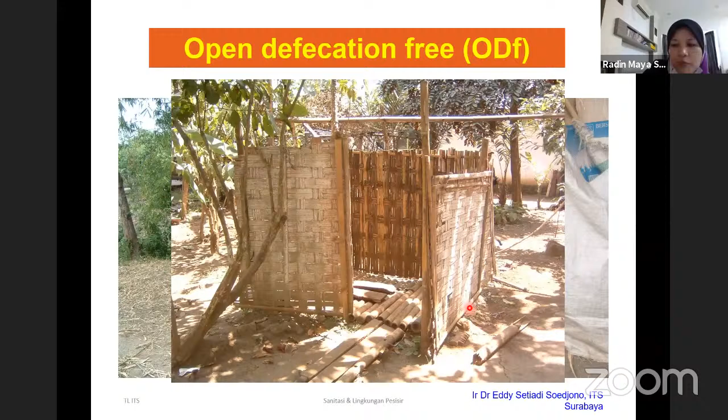Next is about sustainability and sustainable development. As we know, to achieve sustainable development, we must have three components: social equity, economic efficiency, and environmental responsibility. For social equity, we must have good living conditions, equal opportunity for all races, social cohesion, international solidarity, and also maintenance of human capital.

For economic efficiency, we need to have good and sufficient funding so that every sustainable development program or agenda can be achieved. And for environmental responsibility, I think the most important thing is how we deal with and manage our resources. Every country has lots of resources, so how they manage and utilize them to make things better and make sure the sustainable targets can be achieved.

So what are the materials and waste, the risk, rate of change, and also the natural and cultural landscape that we have.

First of all, for wastewater, we have two types of wastewater. This is generally the definition. Domestic wastewater comes from residential areas, commercial areas like shopping malls, institutional facilities, and also recreational facilities. It contains lots of decomposable organic matter and also pathogenic agents.

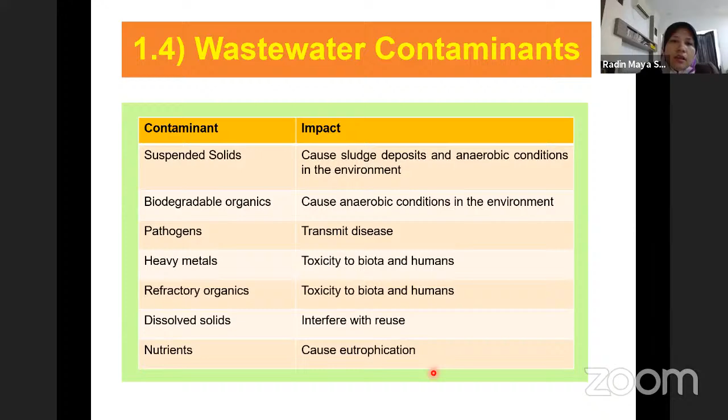Next is about centralized and decentralized wastewater systems. What's the difference between them? In this lecture, I will give you this comparison so that you can distinguish between these two systems.

The conventional centralized system is actually conventional treatment. It has been practiced in most countries, especially developing countries. How does it work? The treatment system is at one location, and it can treat large volumes of water at high rates to accommodate all residential, business, and industrial users. So in Malaysia and many developing countries, they use this type of centralized system.

But of course, it requires high capital costs and also the operating and maintenance costs. However, it gives lack of environmental awareness to the community because they didn't know what happens, because they didn't see the system quite clearly.

While for the decentralized system, this is more on the innovative treatment. So they can install their treatment system on site at their house or maybe at their premises. Okay, so it's either point of entry or point of use here. But here the volume of the wastewater should be low because it's very specific to treat a certain premise or residential area. It's low cost, but the users need to know how to do the maintenance, because they need to operate it by themselves.

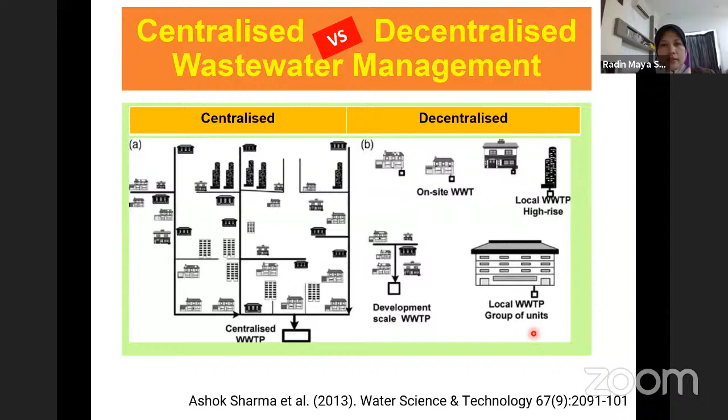For example, here we also have the local wastewater treatment plant, very specific for the high-rise building, and certain scales for some community that share the same area, and also the group of units. So this is the meaning of centralized and decentralized wastewater treatment system. So I go for the examples of the centralized wastewater management in Malaysia.

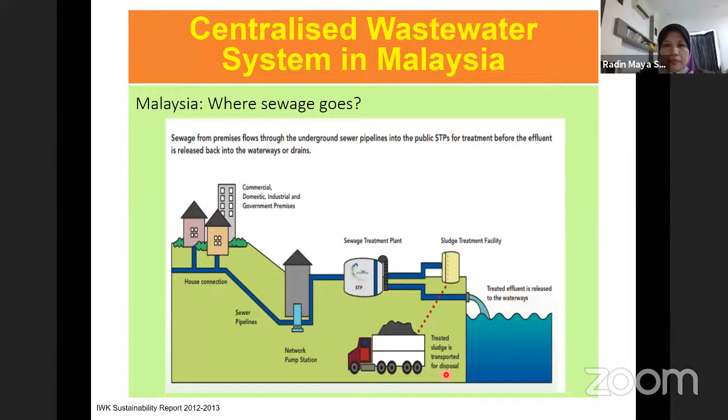Examples of sewage treatment plants in Malaysia are very large scale. So the PE, population equivalent, must be more than a few thousand. Yeah, IWK means Indah Water Konsortium, sewage treatment plant in Bunus. This is the location for sewage and sludge treatment.

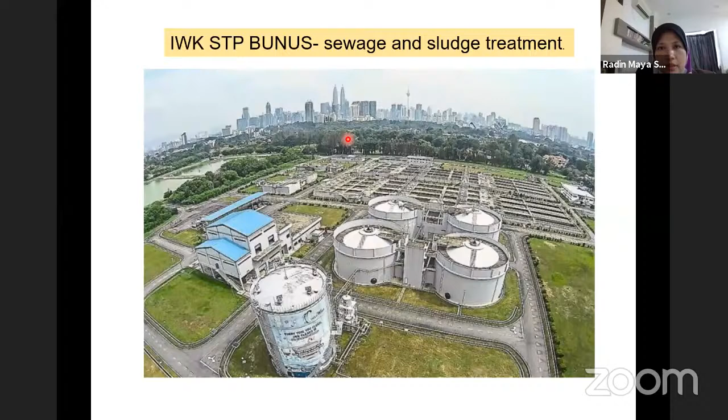Okay, we are using standard A and standard B to check and measure whether the effluent complies with the standard. So after the treatment, we should check here to determine whether our effluent discharge complies with standard A or standard B. It depends on the location of the water treatment plant.

So this is extracted from the Environmental Quality (Sewage) Regulations in Malaysia. This is standard A and standard B. For example, for BOD5, standard A requires you to have 20 milligrams per liter BOD, which is more stringent compared to standard B, which is 50. And you can also check the other parameters. We have suspended solids, oil and grease, and so on.

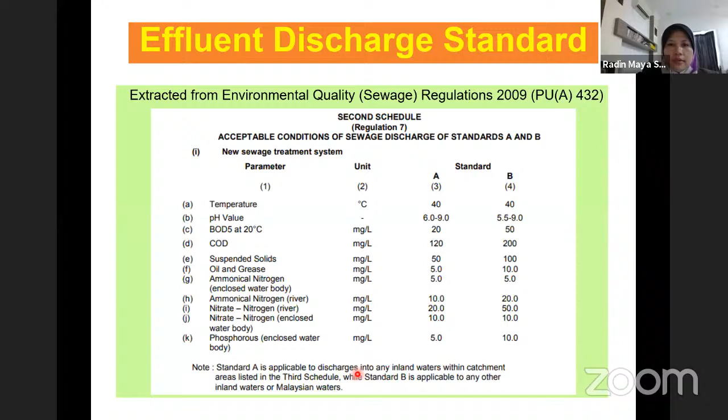But now the government is revising it to include micropollutants or emerging organic contaminants, for example, from pharmaceuticals, herbicides, pesticides, drugs, medicines, because they are very common now in waterways. I think this has become a major global concern too. And because health issues concerning cancer and so on have increased and become apparent, the government is now revising it to include these organic pollutants in the standard.

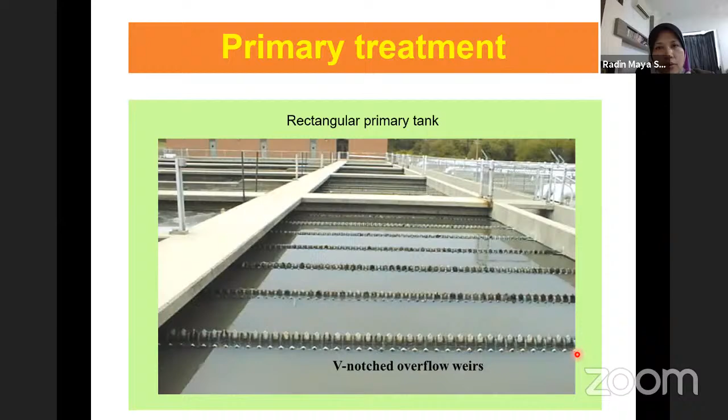In the sewage treatment plant, we depend mostly on our microorganisms because they break down the organic materials available in the wastewater or sewage. These are the major requirements for the microbes to grow. They need an electron acceptor, macronutrients, micronutrients, and also the appropriate environment so that they can form new cells having a specific gravity slightly greater than water, so they can be removed easily by gravity settling. So this is what we aim for.

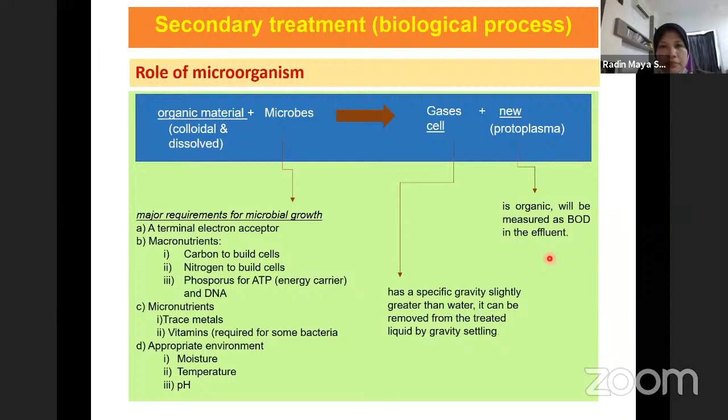And then the new protoplasm, which is organic, is measured as BOD in the effluent. So we target this BOD to be lower after the treatment. We have a lot of abundant microbes in wastewater aerobic treatment, for example rotifers, ciliates, and so on. I'll give you some examples.

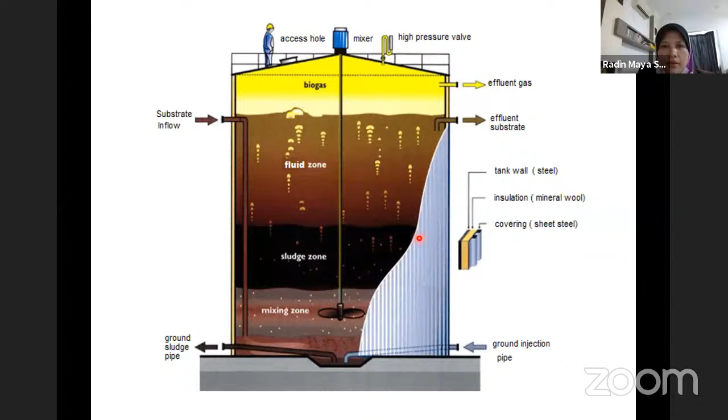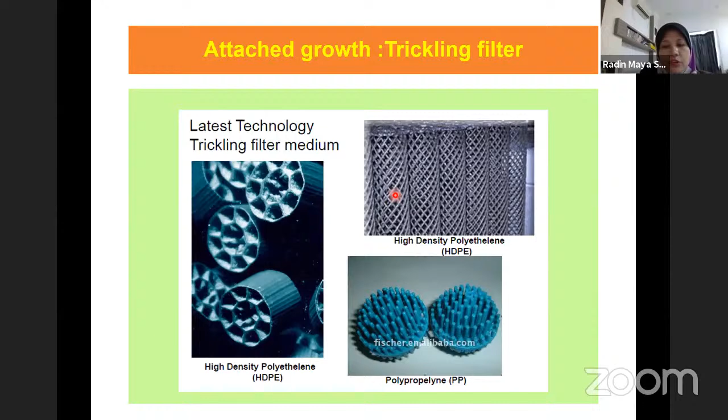For the sewage treatment plant, they can use some of the latest technology to enhance the breakdown of the organic matter by the bacteria. For example, they use certain media, high density polyethylene, HDPE, and also polypropylene, to make sure that they can work faster. And also, for example, the trickling filter, where the slime grows, where the bacteria or microbes attach, so that they can biodegrade the organic matter.

What are the sources of the sludge? We have two: it's either primary or secondary. Sludge from the bottom of the primary clarifier contains about 3 to 8% solids, and mostly 70% are organics. For the secondary sludge, it contains lots of microorganisms because of the biological process, and also inert materials that can be wasted from the secondary treatment sludge.

So you must know where your sludge is coming from, so that you can treat it properly, and then make a decision whether you want to reuse it for landscaping, for fertilizer, or so on. It should come from these two types of sludge.

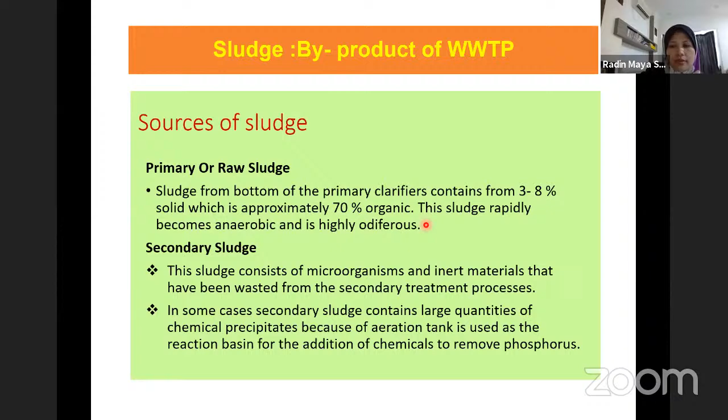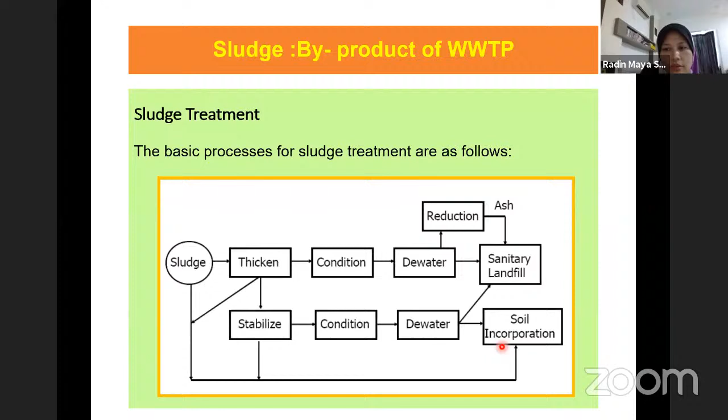These are the basic processes for sludge treatment as follows. We can thicken it, stabilize it, condition it with certain chemicals. We also dry it, dewater, reduce it, and then finally we dispose into the sanitary landfill, or we can use it as soil incorporation, for example, golf course incorporation for the larger scale.

For sludge disposal, we can do land spreading for lawns, gardens, agricultural land, forest land, golf courses, and also municipal solid waste landfill under Subtitle D. And we can utilize it for other materials, for example, construction materials.

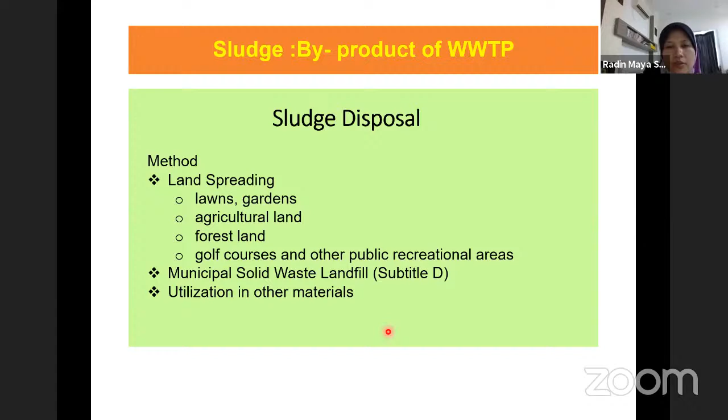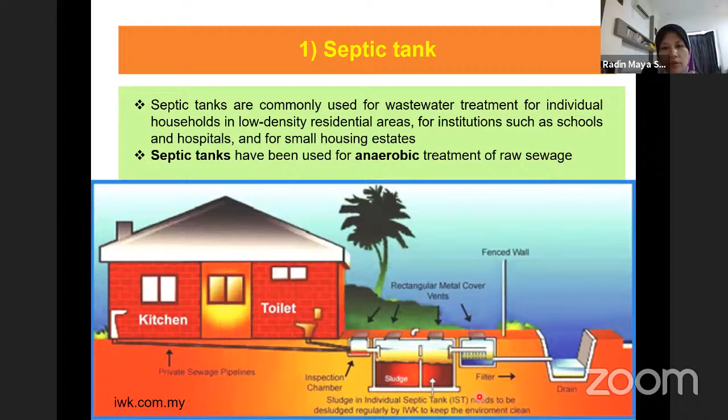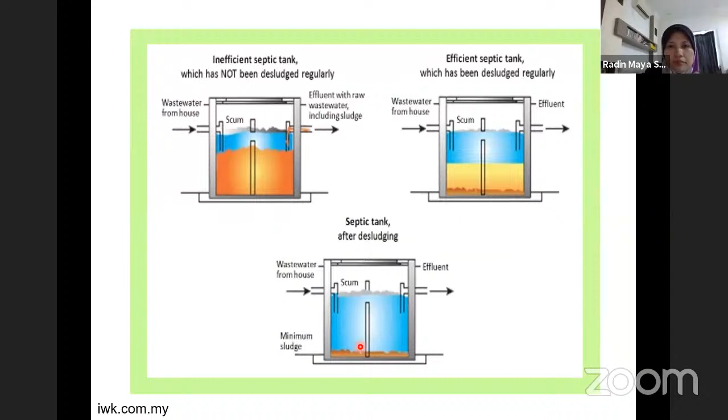Examples of the septic tank for the anaerobic digestion system for the sewage treatment plant. And then we have the guiding principle to design the septic tank. We follow the WHO 1992, because here the principle is we need to provide sufficient retention time for sewage in the tank to allow separation.

We also need to provide stable hydraulic conditions for efficient settlement and flotation, and to make sure that the capacity of the tank is large enough to store the accumulated sludge and scum, and there's no blockage. Everything must be in order. So this is the basic principle if you are to design the septic tank.

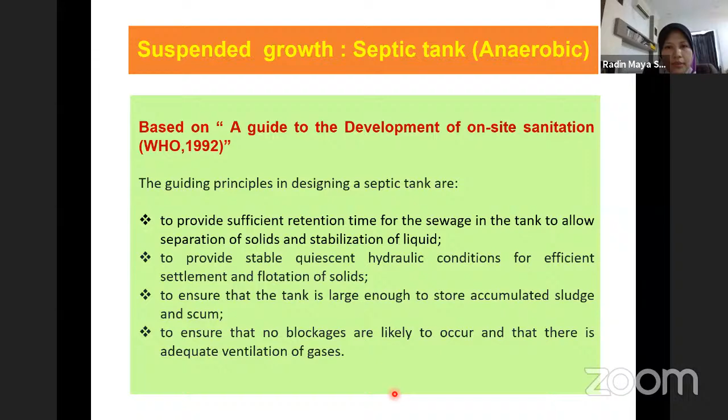To make sure that our sanitation is sustainable, one of the methods that we can go for is renewable energy by using anaerobic digestion. This is becoming increasingly popular now because from anaerobic digestion we can get very valuable biogas from the methane. So it can be used for energy, electricity, for generating your turbine or whatsoever.

Digestate is the solid and liquid digested material produced in anaerobic digestion, and it has lots of valuable nutritional values: nitrogen, phosphorus, and potassium. So it can be used as a fertilizer, for compost, and also animal bedding.

So this is the process of anaerobic digestion. If you have lots of animal manure, energy crops, even food waste, you can create your anaerobic digester here without oxygen. It must be airtight, sealed, so that after a while it can produce the biogas. It can go to the CHP unit and be transferred to the electricity grid.

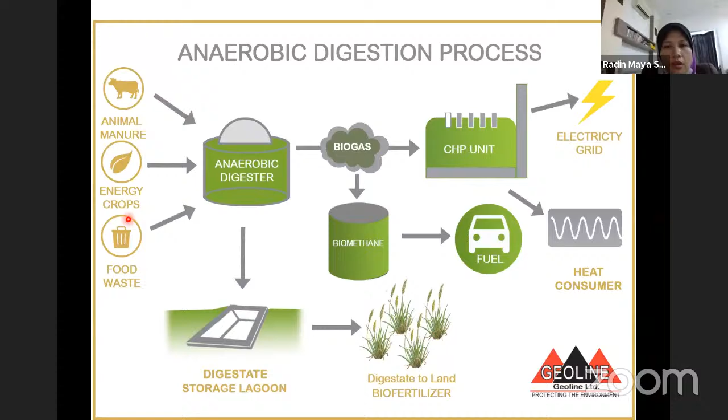I'm sharing with you examples of the project on the anaerobic digester at the sewage treatment plant in Jelutong in Malaysia. They have this biogas AD, anaerobic digester. It produces biogas that can generate electricity for internal consumption at Jelutong sewage treatment plant in Pulau Pinang, Penang Island. This is in the north of Malaysia.

Currently the plant produces an average of 800 cubic meters of biogas each day. Here, a 170 kilowatt gas engine has been installed, and from there it can release electricity from the biogas. It also has an odor control system and a lift in the digester equipment building. So this is the example in Penang.

This is another example of the anaerobic digester using POME. POME means palm oil mill effluent. Because in Malaysia we have lots of palm oil plantations. We are the second largest after Indonesia, and also Thailand. So we have lots of POME.

So the POME, instead of just being released into the treatment system, we can also generate biogas using an anaerobic digester like this. So it can produce the biogas. This is an example of the anaerobic digester in Pahang, in the palm oil plantation.

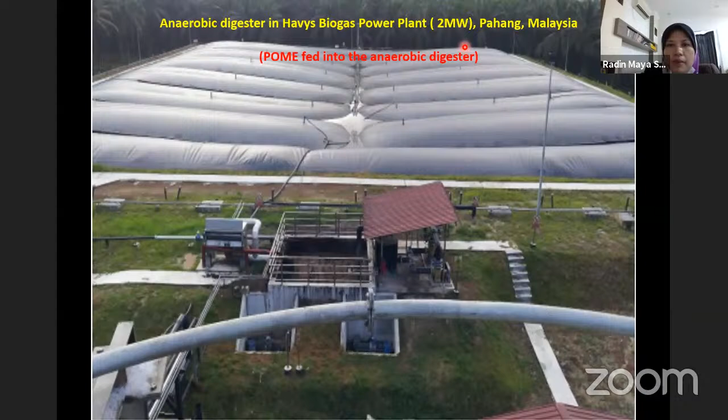Why are the palm oil mills actively involved in biogas production? What's the benefit? Because we want to commit to the Clean Development Mechanism, CDM, under the Kyoto Protocol. As you know, the Kyoto Protocol is the protocol that covers greenhouse gas emissions or carbon emissions.

It also liaises with the United Nations Framework Convention on Climate Change to help developing countries achieve sustainable development through the sale of certified emission reductions, or carbon credits. So this is our approach on how we can commit to the CDM.

Okay, so in Malaysia, we facilitate this by the Conservation and Environmental Management under the Ministry of Natural Resources and Environment.

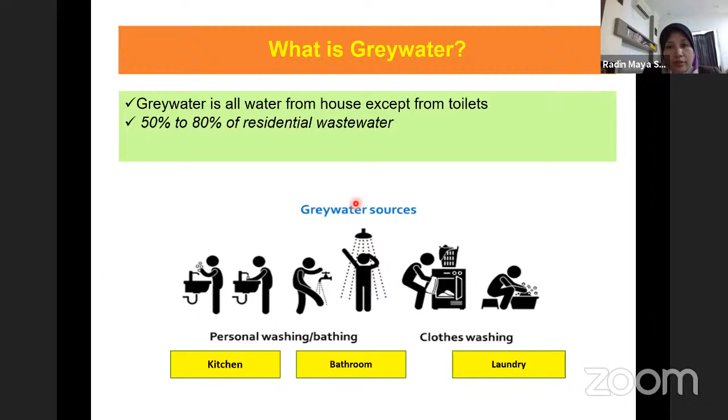A big proportion comes from greywater, which can consist of 50 to 80% of residential wastewater. The problem is, for example in Malaysia, we have lots of direct discharge of greywater into our rivers, like in Kuching. For example, if you have a restaurant premise, only the toilet waste goes to the sewage treatment plant, but the rest goes directly into the river. This gives a very detrimental effect to the environment in the long run.

Okay, so this is one pilot project, Hui Sing Garden in Kuching, by Professor P.D. Jenssen. He's Norwegian, and works very closely with sanitation and water.

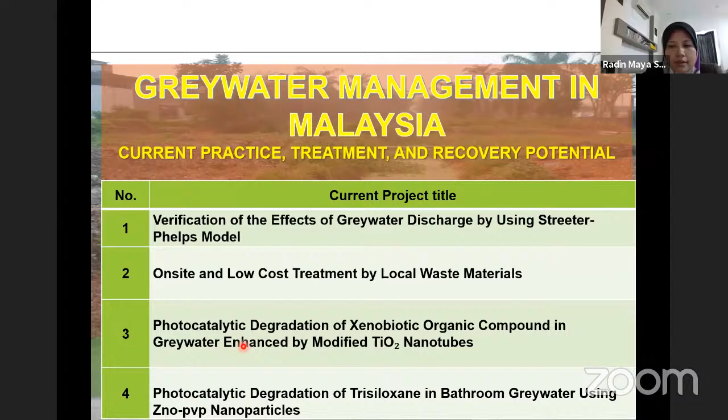This is a common photo showing the practice of how greywater is discharged from households, just near our university. As an example, this individual house in a suburban area has greywater discharge from sinks, bathroom or laundry going to the main water body, and the condition here shows lots of algae, the green one.

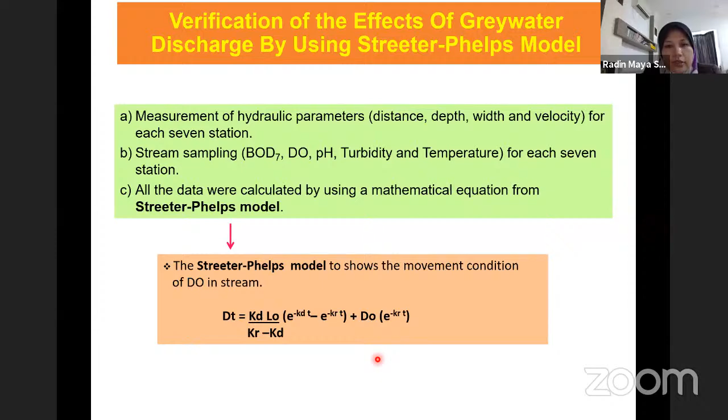Okay, this is the step. We need to measure the hydraulic parameters, and we also need sampling for BOD, DO, pH, turbidity, and temperature. For this project, we include 7 stations, and we calculate using this very basic model, the Streeter and Phelps model, to know how far our greywater can travel and give effect to the river. This is the overview of the sampling locations for the greywater discharge and the stream flow.

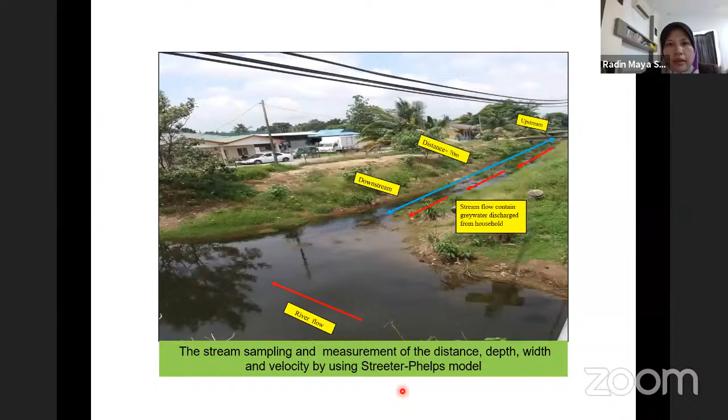And this is what happens in the Streeter and Phelps model, how we see the degradation and decomposition of the greywater. Here, S1, S2 show heavy pollution, yes, because it's very near to the source of pollution discharge. But after a certain distance, we can see the water becomes cleaner. But this is not our reason to ignore the existence of the greywater, because there will be the possibility of non-point sources of other pollution that can come through.

This project is also one of our greywater projects. We use local waste material to reduce the pollution load into the river. So we trap it using our filtration, so the water that goes into the river is much safer. Here we use local waste material - clamshell, ceramic and sand - as filtration. But this needs some maintenance work, cleaning, so it's quite tedious work. Not many people like it, but it's able to reduce COD removal up to 85% using this kind of filtration. But this is only the pilot scale.

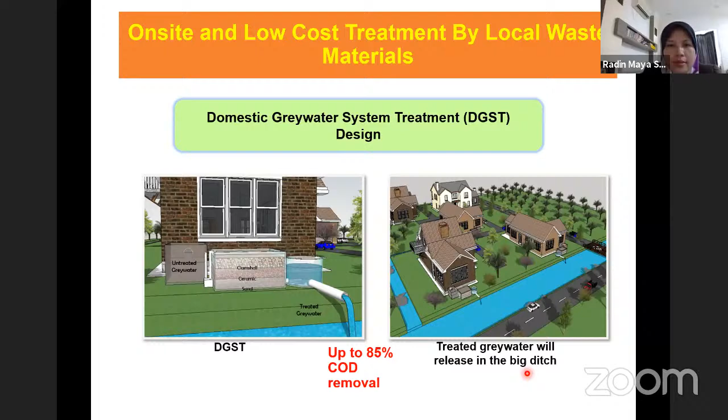For greywater future opportunities, we have lots of treatment strategies to offer in terms of physical, chemical, and biological. But it all depends on the funding, the aspect of your greywater, the strength, and what you aim for - are you going to reuse it, recycle it, or just want safe disposal? So you need to make a good decision.

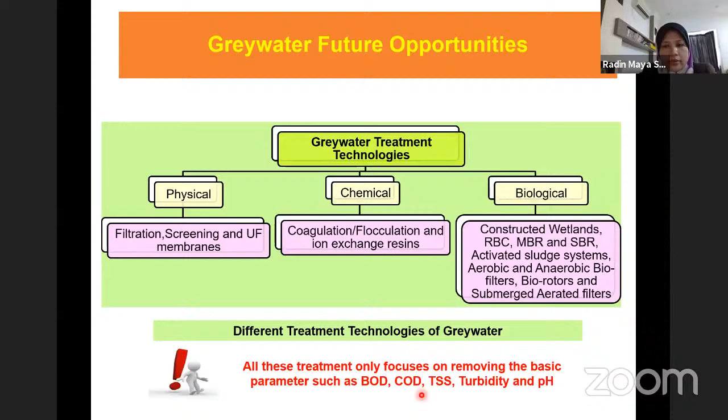But my main concern is, for example, we take a bath every day - I believe everybody does too, shower. In a humid country like Malaysia, we take a bath every day without fail, because if not, we feel very sweaty and it's not pleasant.

So the problem is, from these bathroom activities, we also create personal care products, and with this we call it light greywater that contains xenobiotic organic compounds, XOC. How can we reduce it? Our concern is the houses that directly discharge into waterways like this. For urban areas, all the greywater channels into the sewage treatment plant, that's okay. But for individual houses in suburban or village areas, they don't have this system, so they just discharge into the drain.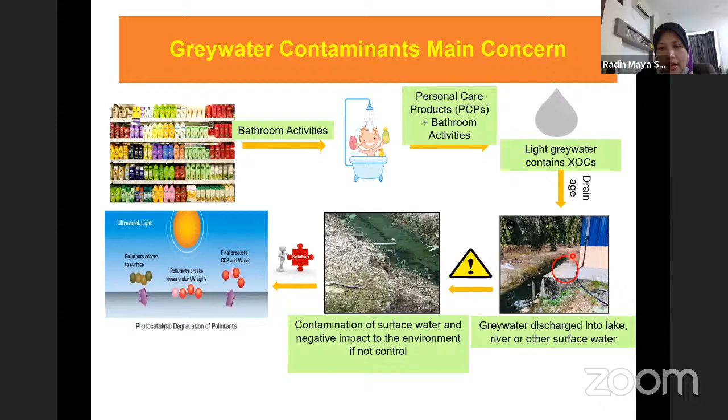So these are the issues: greywater and personal care products produce xenobiotic organic compounds. This is becoming increasingly popular and a main concern, because micropollutants are something we cannot see. We can always ignore their appearance, but suddenly it can become very important for us.

To do something about it, for example, we can do photocatalytic degradation of xenobiotic organic compounds by using modifications of the semiconductor. We can also design a compound parabolic concentrator, so the water can be reused for non-potable uses, like cleaning and toilet flushing, and it can offer very good water saving.

This is an example of the design. You can construct the CPC reactor here. We have the flow meter, we have the greywater source, and because we have a sufficient amount of sunlight, we can do this recycling or reuse potential of our greywater.

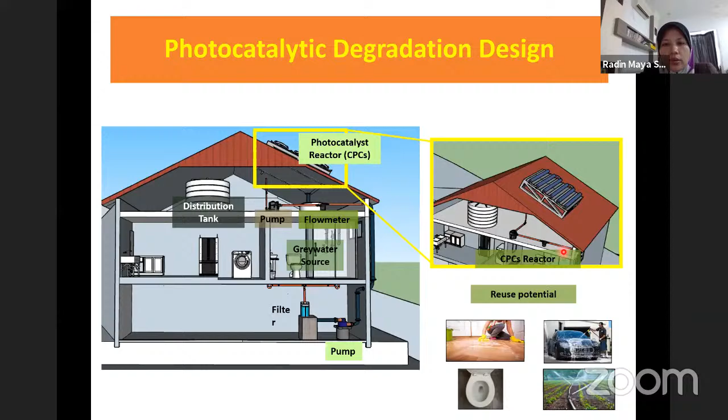One other thing, to do the degradation of the organic compound of the greywater, we can also use zinc oxide PVP nanoparticles. Now many researchers are going for nanotechnology.

Here we absorb the photons by a semiconductor. We have the sunlight, and because photocatalysts have the benefit of energy saving, high efficiency, no secondary pollution, and can be operated at mild conditions, it can be powered by sunlight. So here it is: the compound can be converted into CO2 plus H2O, which is harmless. That's the photocatalyst process.

In my laboratory, we use green synthesis of nanoparticles, for example using Coriandrum sativum leaves, which I locally call ketumbar. This coriander has been used a lot in our food dishes; I think most Indian and Thai food uses lots of Coriandrum sativum. This can be extracted, and we can get the zinc oxide from this extraction to do the degradation.

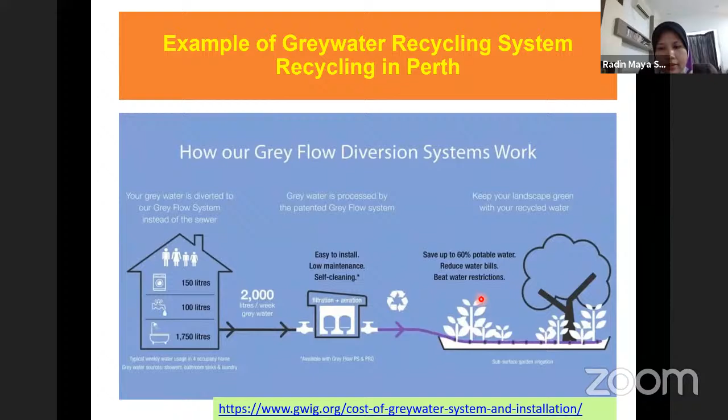Okay, examples of this Perth when they use water reclamation, in order to conserve the water. This is the garden. Usually they will have this subsurface drip line, greywater treatment here to irrigate the water and also to irrigate the lawn, the flowers in their garden beds.

As a conclusion, now we go to the conclusion. Sustainable sanitation is actually an approach that has to be economically viable, socially acceptable, technically and institutionally appropriate, and you must use the wise utilization of natural resources. So this is very necessary to protect human and also environmental health. So recycling, reuse, energy recovery should be integral to all scales.

Like my example, we use the anaerobic digester from the palm oil, which is a very brilliant method to produce energy, biogas, so that we can conserve it. In underdeveloped areas where there are significant deficiencies in financial resources and technical support, you can use some decentralized wastewater treatment on site. But this must have some educational awareness because house owners and premise businesses need to know how to do the maintenance if they have an on-site treatment system.

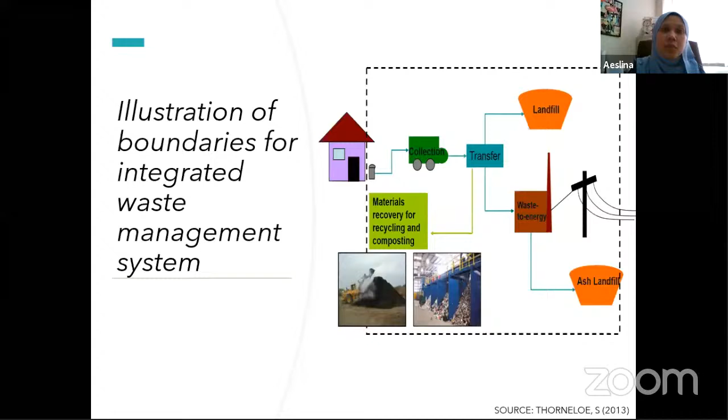So if you see this figure, the illustration of the boundaries of the integrated waste management system, we as the producer always stop when we put the waste outside of our house. Then it depends on the waste collector to collect our waste, for them to transfer it safely to the landfill, or maybe they are going to recover it for materials recovery, recycling, or composting, or they are going to convert it into energy. So it is as if we, as the producer or the generator, do not care about the waste that we produce, which is wrong, okay?

So I just want to recap on the definition of solid waste so that we are on the same page. Solid wastes are the wastes arising from human activities that are normally solid as opposed to liquid or gases, and discarded as useless or unwanted. Normally, we are focusing on urban waste as opposed to agricultural, mining, and industrial waste. Normally, we just use the term solid waste, but actually solid waste has different categories and classifications. For example, under solid waste, we have municipal and other waste, for example, construction, industrial waste, auto bodies, and so on.

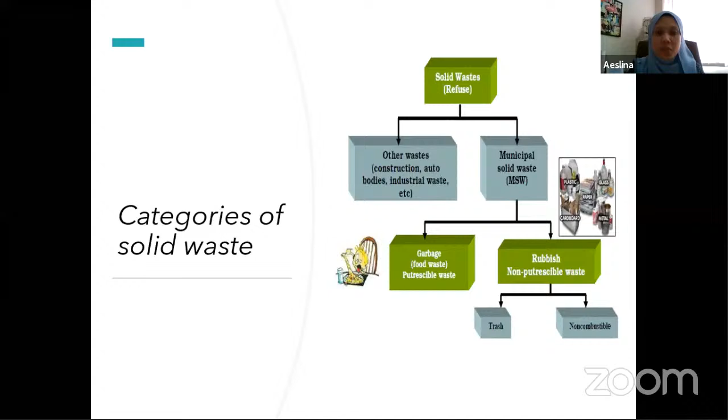Under municipal solid waste, we have different classifications, which are garbage, or what they normally call organic waste or food waste, which is degradable, and also rubbish, which is non-degradable waste, which we normally use for recycling. For example, plastic, glass, paper, cardboard, and also metal. And under rubbish, there are 2 categories, which are trash and non-combustible. Normally trash is all the bulky waste that we keep in our house, for example, old couch, mattress, television, refrigerator, and so on. Okay, so now we already know the definition of solid waste and we can move on to the next one.

So this approach is not solving the problem, because we only relocate the waste, often outside the cities into rural areas, and it's going to increase soil and water pollution, aggravate greenhouse gases, and also increase the difficulty of the final treatment of the whole waste. So it is actually not good to practice this, but we must admit that we have low local capacity and resources. Another thing is that we also have a lack of awareness. We as generators of the waste lack awareness about efficient waste recovery processes and minimization practices. Sometimes this is also accompanied by very bad or ineffective policies in municipal solid waste.

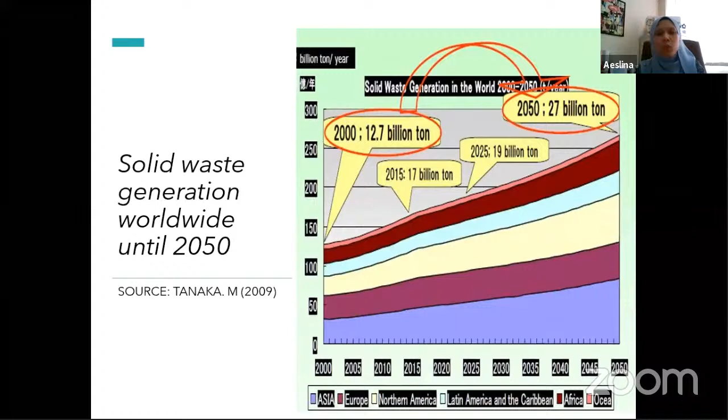So 44% is going to end up in the landfill. If we could avoid this 44%, we are going to increase the lifespan of the landfill. So please eat properly and do not waste your food. Okay, that is number one. And then number two is paper and cardboard, which is 17%. This amount we can also divert from the landfill because we can recycle paper and cardboard. The third one is other waste, and the fourth one is plastic.

I want to talk about this plastic waste because the plastic waste can be in the environment like forever. It cannot be degradable because it is the characteristics of the plastics. And then once we use the plastic and we throw it away, it's going to be in the environment for maybe 1,000 years. So it's going to have an impact forever on us.

So what is the best way along the pipeline? We have to cater to this issue, especially the plastic waste. And then during this COVID-19, so much plastic waste is being generated due to takeaway food, and also all the PPE are made from plastics. So the plastic waste amount increased quite significantly during COVID-19. So it's going to add to the problem, which is already at risk. So we have to do something about plastic waste. We can learn later from the successful countries or case studies.

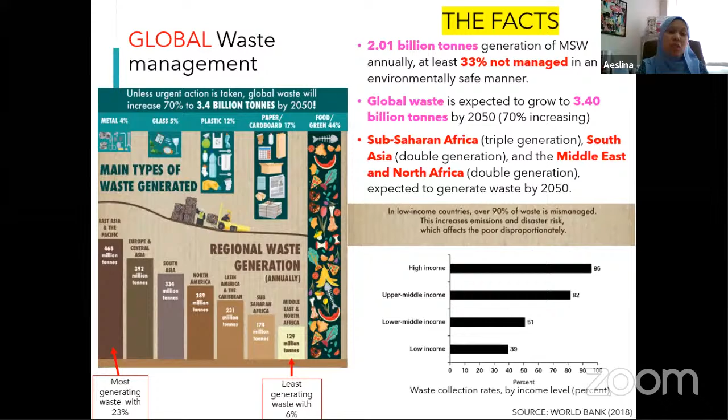If you see from the chart there or the graph, it says that in low income countries, over 90% of waste is mismanaged. So this is going to increase the emissions and disaster risk, which affects the poor disproportionately. When we focus on waste management in the Asia region, we can see that municipal solid waste is very high at upper middle income. This is due to rapid urbanization and the materials manufacturing needed at the upper middle income level, which makes it the highest in terms of municipal solid waste per capita.

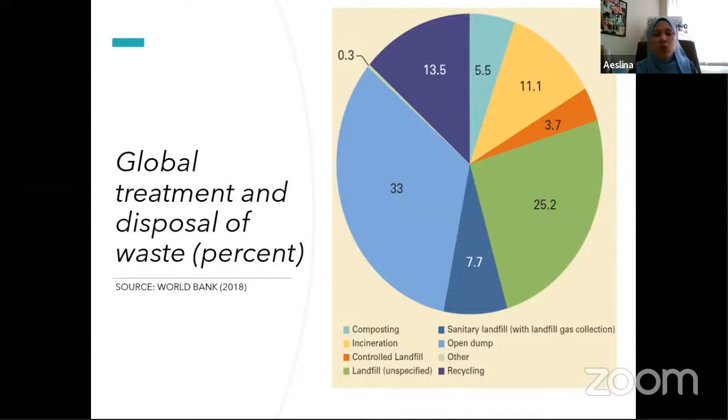When we talk about landfill, you see that 33% is dump site as well as unspecified landfill, which we also call dump site. The most disadvantageous point of this dump site or unspecified landfill is that normally we have many different levels of landfills. We have level 1, level 2, level 3, and level 4. Level 1 normally has a perimeter fence and drains. Then they can upgrade to level 2 with a gas removal system. Level 3 is a leachate recirculation system.

Level 4 upgrade with leachate treatment system. If we are talking about sanitary landfill, they are going to have all the available equipment and facilities. But if we are talking about dump site, they do not have all the facilities. If we are talking about unspecified landfill, maybe they are going to have perimeter fence and drains, just to mark that that is the location for unspecified landfill. But normally they do not have liners. That is the most disadvantageous of the unspecified landfill as well as dump site.

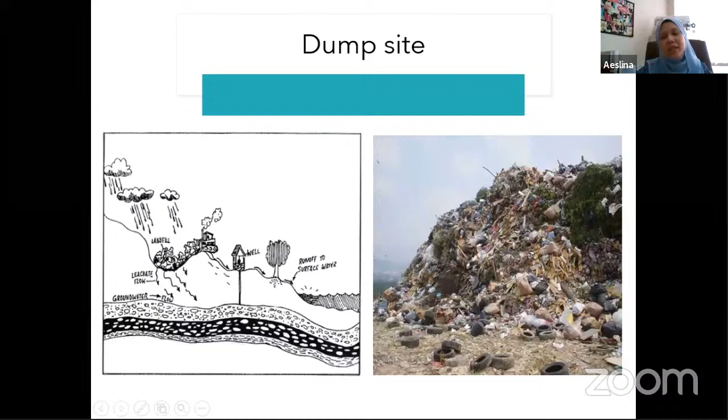So this is what happens if we dump our waste in a dump site or the unspecified landfill, which hold quite a bigger percentage in the pie chart just now, all over the world. So this highly mixed waste, we have organic waste, recyclable items, other types of waste, we mix it together in a plastic bag. We as a generator just put it outside of our house and we expect, okay, the collector will collect the waste and my problem is done, okay? So this is what happened at the dump site. Various types of waste, various types of dump site or unspecified landfill. And unfortunately, we also dump medical waste, aerosol, toxic waste, as well as electronic waste in the normal dump site or unspecified landfill.

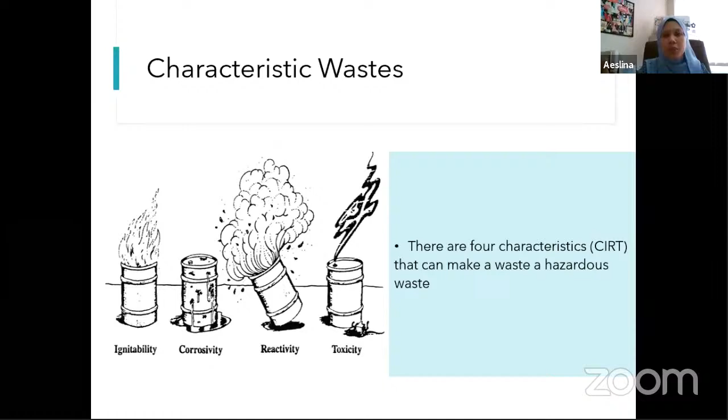So it's a big no for the hazardous waste in the landfill because it contains very high toxicity, which is not suitable. It should be in the secure landfill, not in a dump site, not on the unspecified landfill, not on the sanitary landfill. It should be in the secure landfill or incinerator. Even though solid waste and hazardous waste seem like brothers and sisters, they are waste, so hazardous waste may be the brother of solid waste, but no, they are not. So hazardous waste are very dangerous if handled wrongly, because of their 4 characteristics, which are ignitability, corrosivity, reactivity, and also toxicity. So it is not supposed to be in the dump site, unspecified landfill, or sanitary landfill. It must be in the incinerator, either treatment, or also secure landfill.

So when we dump 33% plus like 25% on the unspecified as well as the dump site, we are going to increase the impact on the water pollution. We know that all the waste that we generate and dump at the dump site or the unspecified landfill or non-sanitary landfill, every ton of the municipal solid waste is going to generate 150 liters of leachate, which is 2.5 million liters every day. So the leachate will flow and also percolate through your waste every time there is a rainfall and also runoff, and it's going to create contamination to the water or the surface water. So if we see that 150 liters of leachate, which is 2.5 million liters every day, I think every single one of us here could have one private swimming pool of leachate. So we have to think carefully before we throw our waste.

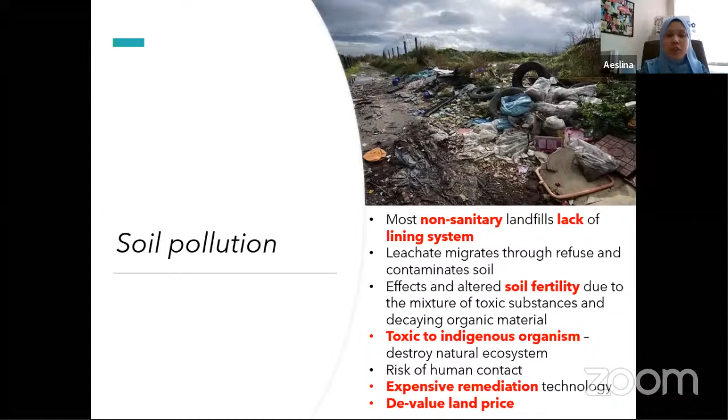Expensive remediation technology will be needed if the soil is really contaminated, and obviously for a place where we dispose waste, normally the land price will be very low or devalued. So leachate migrates through refuse and contaminates the soil. This figure shows soil pollution, where the soil loses its value in terms of its chemical and nutritional requirements. We mess up the ecosystem of the soil, and trees are infertile due to contaminated soil. So we could not do any plantation activities.

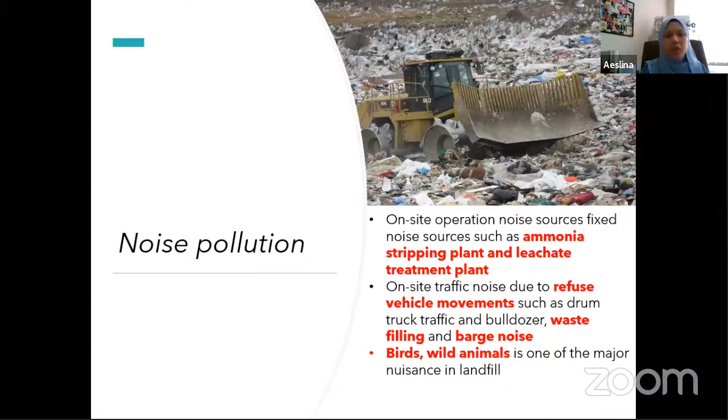So the figures show some of the noise pollution, not very significant, quite minimal, but it is there. The dump truck transfers waste from the transfer station to the landfill site, the loud banging noise in the landfill, and also noise from birds and other wild animals scavenging for food.

Another impact that we could not neglect is the health impact. Because we just select a place, an open dumping place, we excavate the soil, we put the waste there, but we do not cover it properly with soil, and we do not compact the waste properly. So the waste is exposed to the environment. What happens is that it is going to become the breeding ground for various pests, including rats, flies, and others. And it's also going to invite scavengers, animals and also humans.

So because our waste is not covered properly with soil, and we do not compact it properly, the flies are going to cover every inch of the surface, especially on the food waste. That's why I said earlier, please reduce the amount of food waste to the landfill.

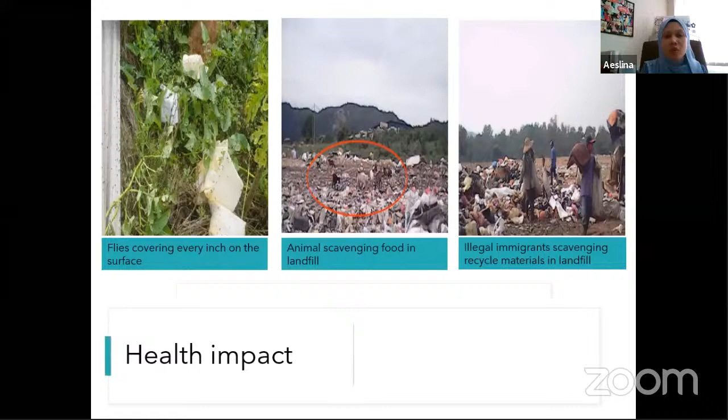And then there is scavenging by the animals, finding food at the dump site area, and also the illegal immigrants scavenging for recycled materials because it is value for money. But what happens is that they are going to tear up all the plastic bags, and they are going to expose more of the waste to the environment, to the rainfall, and it's going to produce more environmental pollution, which is not good.

Okay, one of the disposal methods is incineration. Incineration has its own advantages as well as disadvantages. One of the advantages of incineration is that it reduces the volume by 85 to 95%. It is such a huge amount that we could decrease by using the incineration method. And then we also can recover conversion products as well as energy.

But the major concerns are air pollution as well as siting, because the residents have this mindset: not in my backyard. We can implement an incinerator, but not near our house, okay? Because of the air pollution. So one of the issues with incineration is that all the ashes produced from the high temperature burning have to be disposed of and also treated properly. They treat it first and then dispose of it later in the secure landfill.

There are also many concerns about the health effects of dioxin and furan emissions, which are carcinogenic, from the atmosphere from all incineration. Incinerators normally do not have a good filter, so they produce dioxin and furan emissions, which are carcinogenic to the workers and to the surrounding area.

Other than that, sometimes the incinerator will produce high concentrations of heavy metals at different levels, because they burn everything, but they accumulate certain heavy metals in the ash. So it is quite dangerous as well, and that's why we have to properly dispose of the ash.

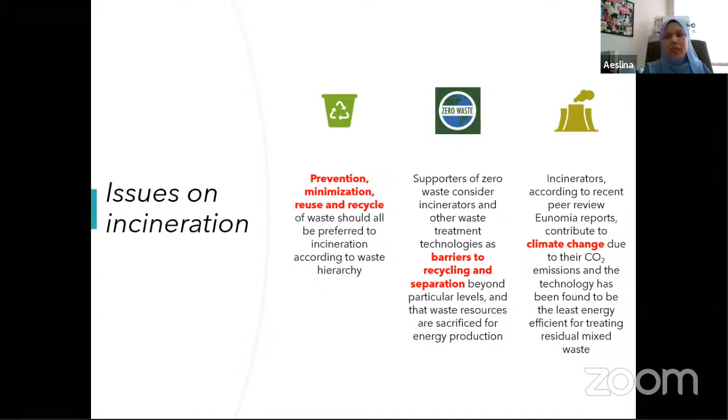It's also going to detoxify combustible carcinogens, mutagens and teratogens. This means it stabilizes all the toxicity in the waste through the burning session, and it reduces a lot of the leachate that normally comes out from the landfill.

Other than that, it will also enable better management of potential air emissions at a central location, because if they have a good filter, they can control the gas emissions that come out from the incinerator.

Last but not least, there's potential for energy recovery from the heat release, and valuable products that can be reused, recycled or marketed. They can focus on energy recovery from certain waste that has a high calorific value, using it as fuel instead of oil to burn the waste in the incinerator.

So for the effectiveness of treatment methodologies for organic hazardous waste, the priority is thermal, then biological, chemical and physical, because thermal always has the highest organic waste destruction rate, 99.999%, compared to others. So incinerators are quite good in terms of volume reduction.

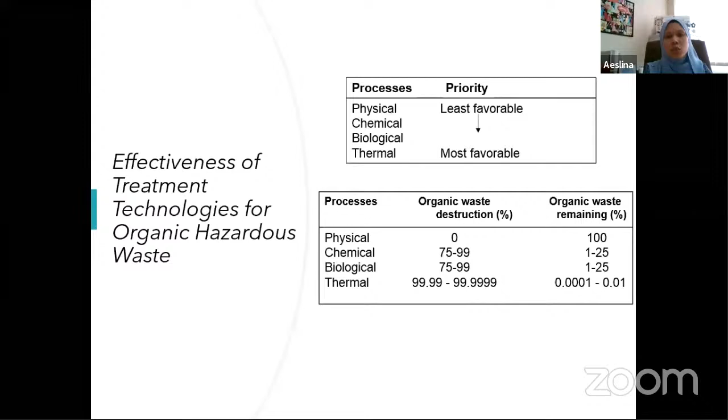And then air pollution obviously is going to cause acid rain, which is not good, especially if we live in a city.

One of the disposal methods we mentioned before is also composting. Because if we talk about recycling, we always focus on plastic bottles, glass, cardboard, papers, and so on. But why do we not recycle our food waste?

As for waste composition throughout all countries, normally the most generated waste is food waste, which is 40 to 60% compared to other types of waste. So the best way is to compost your organic waste or food waste.

The definition of composting is simple: the organic fraction of municipal solid waste is converted into earthy, humus-like material by the action of worms, bacteria, and other microbes. We can also do it at home, tackling your own food waste from cooking, leftovers from lunch, dinner, or breakfast.

Some countries have realized the importance of composting, because if we can reduce 40 to 60% of food waste going into the landfill, we increase the lifespan of the landfill tremendously. We should control food waste because, due to its biodegradability, it produces methane gases, and the moisture affects the digestibility of other materials. So it is not good.

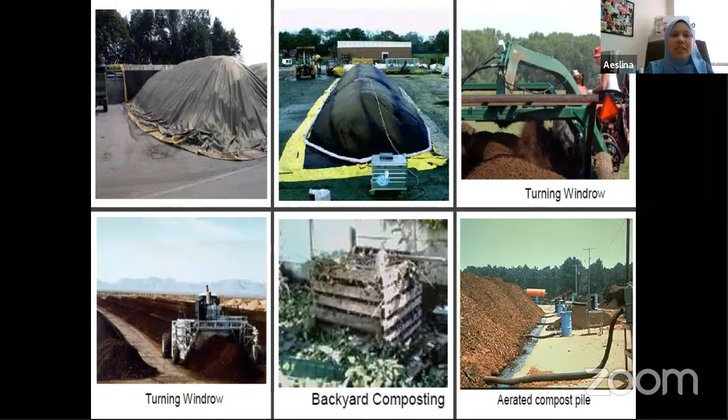The process application of composting is for yard waste collected separately. We can compost the organic fraction, and also compost partially processed commingled municipal solid waste, and maybe co-compost it with wastewater sludge if we do not have enough bacteria.

Issues in the implementation of composting include the production of odor, but we can prevent odor issues if we do the steps correctly, and also public health issues or pathogens, heavy metals toxicity, and product quality.

Normally if you do composting, you end up with organic fertilizer. All available chemical fertilizers have a proportion of chemicals put in to ensure quality. But with organic fertilizer, normally we cannot ensure the quality, because it depends on whatever we eat and whatever we compost.

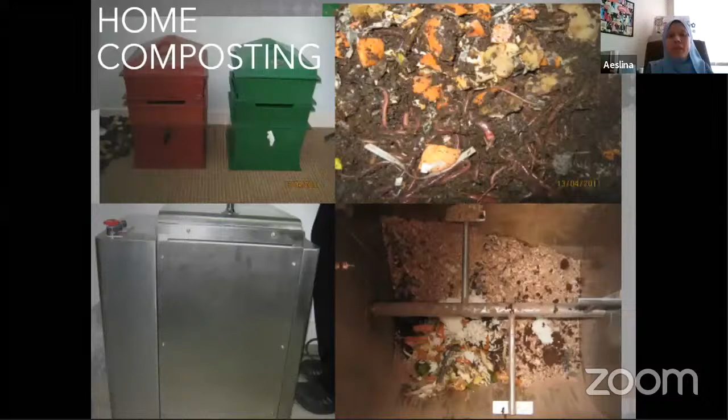This is one example of home composting, which we can do at home. This is Prof. Takakura from Japan, who introduced the Takakura method, which is very simple.

We can do it at home using boxes or a basket, and all the ingredients needed are also available at our home. You can browse through, and you can also email me, I'm going to guide you on how to do the Takakura home method composting.

These are some examples of the Takakura method using a basket and also a composting medium, which is available in our kitchen.

If you want to highlight the concept of sustainability, we have to highlight a few approaches. We have to gather this approach as a whole on the environmental aspect, social aspect, and economic aspect. Then we can tackle sustainability as a whole.

These are the linkages of the Integrated Resource Recovery Centers, IRRCs, in secondary cities and small towns of the Asia Pacific region. In New York, the General Assembly of the United Nations adopted the 2030 Agenda for Sustainable Development as a global plan of action for people, planet, peace and prosperity. The 2030 Agenda contains 17 interrelated and indivisible sustainable development goals with 169 targets and 244 indicators.

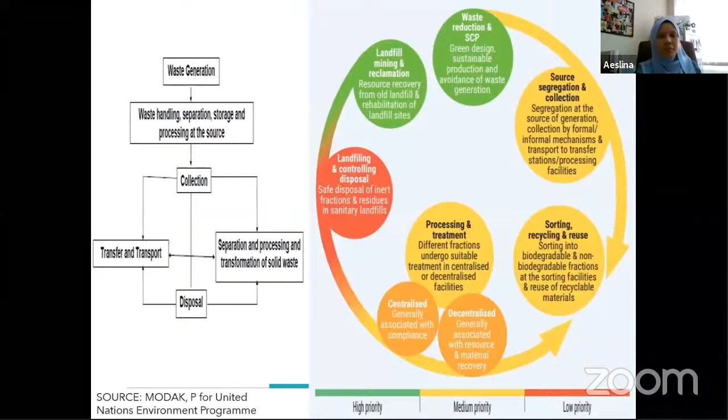There are a lot of factors that affect waste generation rates: source reduction and recycling activities. If you are active in recycling activities, obviously your waste generation rate is going to be reduced. Also your attitudes, as well as legislation by the government, matter. Geographic, cultural, and physical factors also affect how we generate our waste. That's why at different places, the generation rates are quite different per capita per day for each of us.

When we talk about waste, normally we just say total waste generated. So in total waste generated, actually in the house, we have the waste that we do not want. It will be labeled as waste discarded. Even though we do not want it or don't use it anymore, do we want to keep it as waste retained to use again? For example, old clothes - do you want to use them again, maybe to wipe the house or whatnot, or maybe recycle them to generate a new bag or something else.

So the waste discarded, or unwanted waste, whether you want to retain it in the house and use it again, or dispose of it straight away. Once you dispose of it, it becomes waste disposed, where you put it outside of your house and it will be collected by the waste collector.

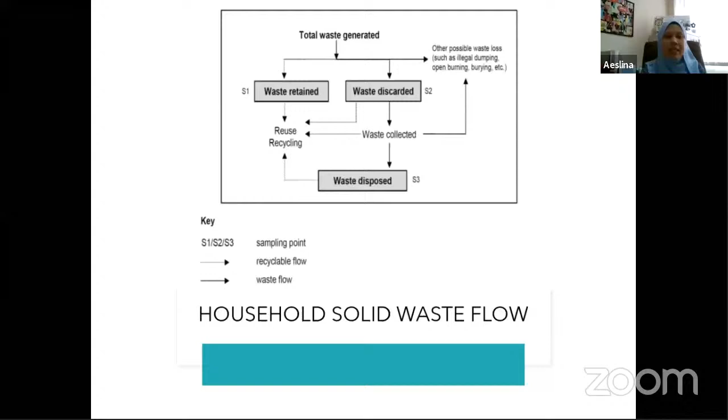But now you have to change to the new waste management paradigm, which you have to emphasize, or you have to think carefully on how to reduce and maybe come up with product design or producer responsibility. It's our responsibility to reduce the waste, to reuse it, recycle it, or maybe you have to practice compost on the organic waste, transformation, and last but not least, landfill.

So we have to focus on all the steps before we dispose it outside of our house. That is our responsibility as the generator. We are all the generator, me and you. So actually there are many steps online that you can refer to and so on and so forth. We can reduce the waste and there are so many methods. Okay, I choose one example.

Purchase products in bulk or larger size. For example, why do we have to buy a water bottle which is 500 ml if you can buy a water bottle that consists of 1.5 liters of water? So you are going to reduce the amount of plastic waste because you buy the water in a larger size. The larger, the better, okay?

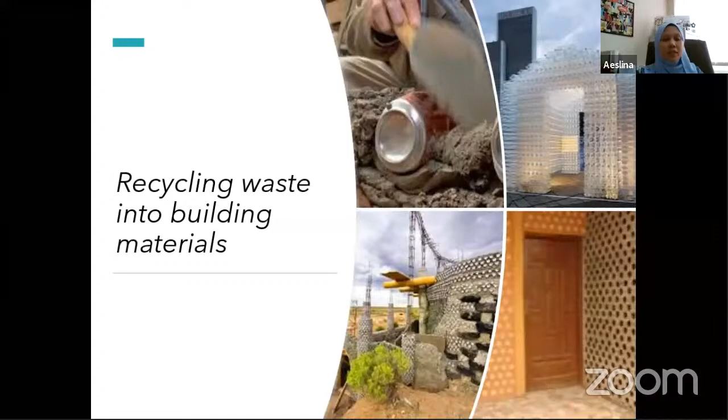So what are the advantages of recycling waste in building materials? This is on a serious note, on recycling that has scientific data and so on. The previous one is just for fun and we can do it at home, but this is research-based. I'm also in this area.

So the advantages of recycling waste in building materials are that it's going to reduce the amount of waste sent to the landfill. It's going to conserve natural resources. This is what all the developing countries are trying to do. That's why they are trying to create new material. And then we can increase economic security, prevent pollution, save energy, and also come up with alternative low-cost, cheap materials.

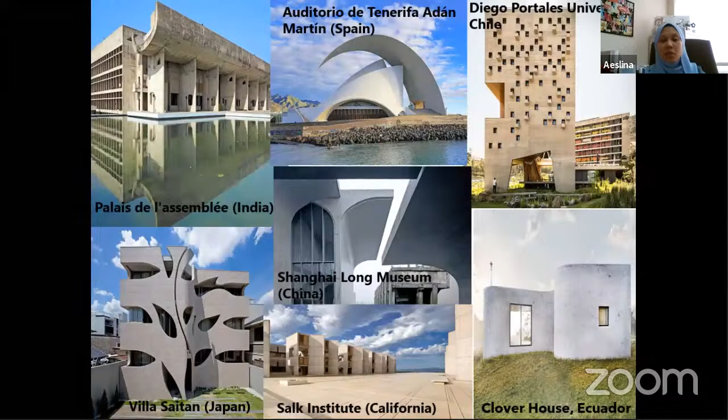Because we recycle waste inside the building material, we must make sure that it is safe for us to use or to live in the building that is made from the waste material, in terms of the leachability, the gas emissions, the compliance with the standards and so on, okay? So these are the leaching testing procedures.

The leaching testing procedure is normally used for hazardous landfills. Every single hazardous waste that you dispose at the incinerator or secure landfill has to go through the leaching testing procedure just to ensure that the toxicity level is compliant with the standards before being treated and finally disposed in the secure landfill.

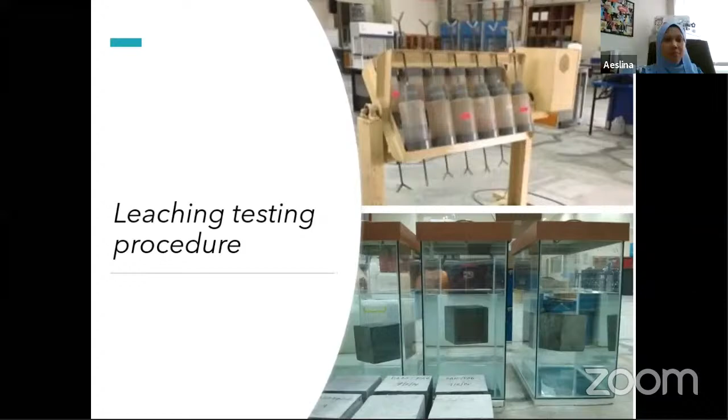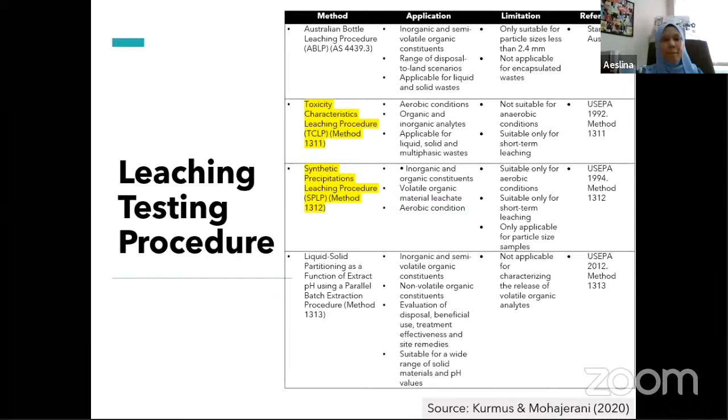So when we try to recycle waste into building material, there are many factors affecting or controlling the leaching behavior of the heavy metals or the toxicity from the waste, chemical as well as physical. So there are a lot of leaching testing procedures that we could use, and there are many references according to country, but the most commonly used is the United States Environmental Protection Agency. A lot of testing, a lot of references according to countries and also region.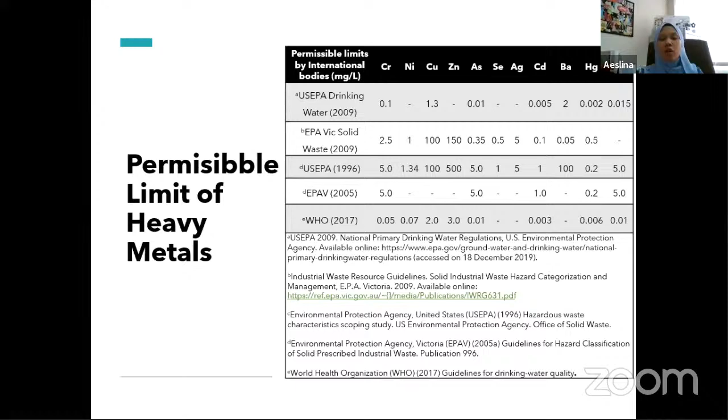Just to ensure that the heavy metals are compliant with the standard, so that the building material built from the mixture of the waste and the raw material is safe to be used. And also the gas emission. Whenever we fire the fired clay brick, for example the brick incorporated with waste, normally the gas emission will also be detected. We just want to ensure that whatever waste we put in is going to be safe in terms of the emission, the leaching, and so on, so that the consumer will feel comfortable living in it.

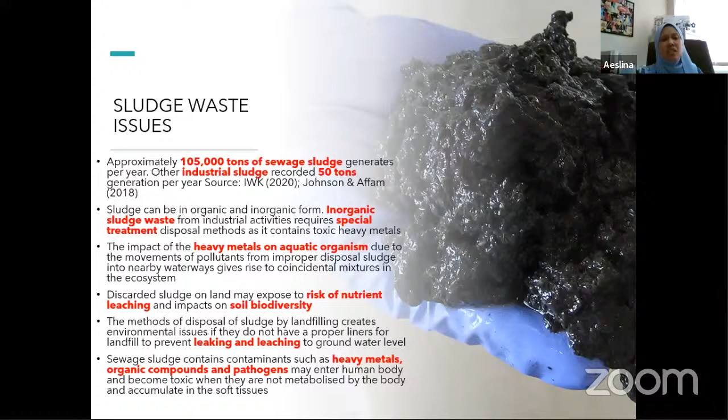Okay, I'm just sharing some of the studies that I did on sludge waste issues. There are a lot, 105,000 tons being produced in Malaysia. So I incorporated sludge into brick, and it was successful and complied with standards, even though the sludge contains very high heavy metals. The good thing is that it is able to be incorporated in brick and comply with the standards, and also with the physical and mechanical properties.

We also have a university-industry partnership, because this is what industry wants now. They have the waste, they want to use it, but they do not know how. So we help and assist them on how to make profit out of their waste, not spending money to dispose of the waste.

Okay, on the sewage sludge bricks, we also recycle sewage sludge into building material. The number is quite high, 5.3 million per year, and it was also successfully conducted. The agricultural waste issues are also quite high in Malaysia, because we have palm oil mills, since we are the second largest producer. So we have a lot of agricultural waste issues, and we also managed to recycle it into building materials.

And during my study, I did my PhD in Melbourne. It is stated that 7 years in a row during summer, they try to pick up all the littered items on the road, and cigarette butts are the #1 most littered item in Victoria and all around Australia. So they think they have to do something about it. So I recycle cigarette butts into fired clay bricks.

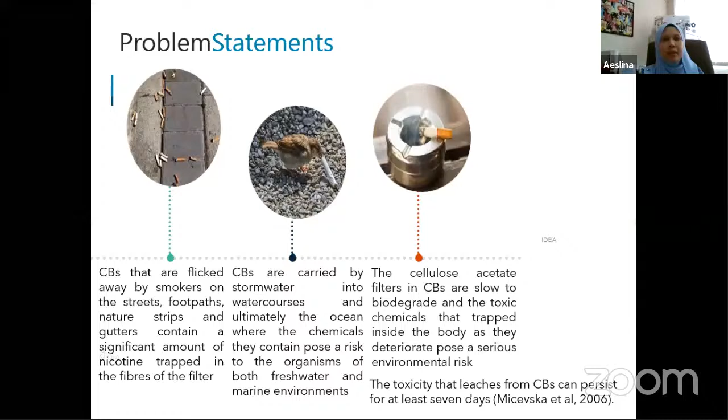We know that cigarette butts have more than 40 toxic substances concentrated inside the butt, because it traps whatever we smoke in, and eventually we try to recycle it and it complies with the standard. So we are going to save money in terms of disposing all this waste, and we are making profit out of it. But we have to use it carefully, and we have to know how to play around with this waste.

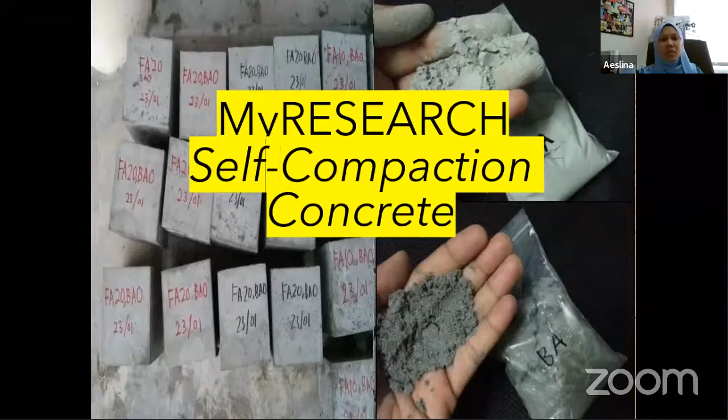Another waste that we try to recycle is fly ash and bottom ash, with a production of 100 to 200 million tons per year. So we recycle it into concrete, and it can be put up to 30% in self-compacting concrete, and comply with the requirements in terms of physical and mechanical properties as well as leaching. Okay, that is on the recycling.

And then we move on to the case studies. We have to learn from the best countries on how they manage their waste. So we have this global waste index that offers a comprehensive breakdown of the most environmentally friendly methods of waste management. It ranks the 36 countries within the Organization for Economic Cooperation and Development, OECD. So we do not want to look at the top 3 worst at managing waste, but we are going to learn from the top 3 best at managing their waste.

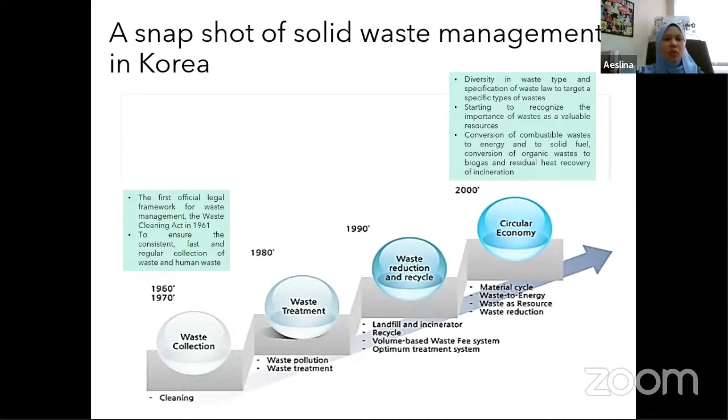So #1 is South Korea. How did South Korea do it? They were also facing the same problem as us. In the 1960s and 70s, they focused on waste collection, then in the 1980s waste treatment, 1990 waste reduction and recycling. In 2000, they focused on the circular economy. Circular economy is on reduce, reuse, recycle, and recovery. So South Korea has a highly organized waste management system known as Jongnyangje.

I think the best part is when they introduced the volume-based waste fee, VBWF system, which is pay-as-you-throw waste management. We have to pay to throw the waste, especially food waste. So they managed to ban food waste from going to the landfill. And they also implemented radio frequency identification, RFID, in the food waste management system.

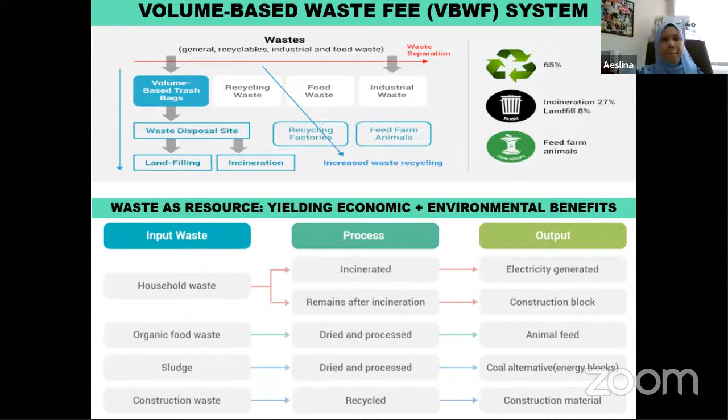Okay, they have a clear route for every single waste. For example, food waste, recycling materials, municipal solid waste, where does all the waste go? They have a clear route for that. And they also have volume-based trash bags for food waste. They manage to recycle 95% of the food waste.

So the success story of South Korea is that the system led to a 17.8% reduction in municipal solid waste generation and a 21% increase in recyclable waste. And they also increased the recycling rate from 15.7 to 43% in 2001. And the current recycling rate is 59%, which is quite huge.

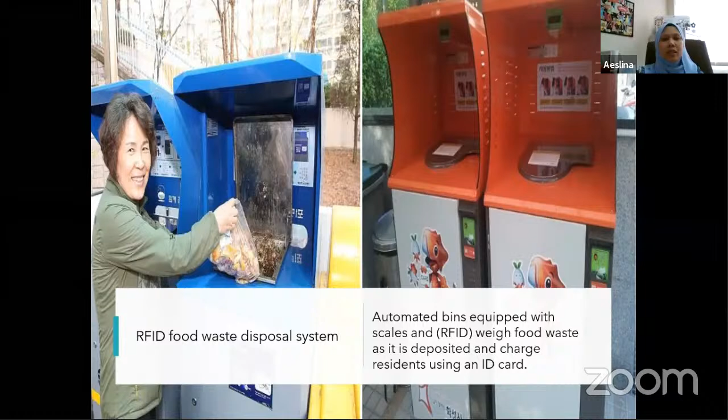They also have this RFID food waste disposal system. The automated bins equipped with scales and RFID weigh the food waste as it is deposited and charge residents using an ID card. So you have to pay as you throw the waste. And they also have reverse vending machines where you can put plastic, bottles and so on, so that you get money out of it.

Okay, the number 2 best country is Sweden. Sweden managed to change from every person recycling only 40 pounds to every person recycling an average of 357 pounds. And they managed to reduce the waste going to the landfill from 430 pounds to only 6.6 pounds. I think the reduction is quite significant.

Okay, they focus recycling on aluminum cans and PET bottles because they know that aluminum cans and PET bottles are the most common waste that we normally use and recycle. So they focus on these two, equivalent to 1.8 billion cans and bottles, or an average of 177 per person per year. So they managed to recycle almost 85%. And they give money: 1 krona for a can or small bottle and 2 kronor for large bottles.

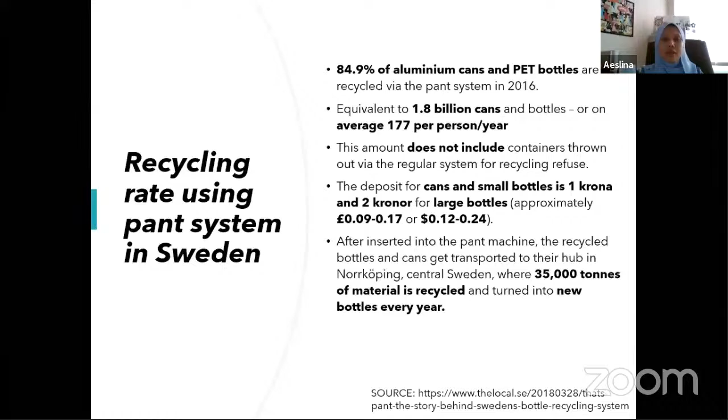So waste to wealth. You recycle waste, you get the money. So now 35,000 tons of material is recycled and turned into new bottles every single year. So they recycle a bottle to turn into a bottle.

And all the household garbage from nearly 10 million residents, they convert it into electricity and supply heating demand of 1.25 million apartments and electricity for 680,000 homes. So they do not have to pay for the electricity because they can recycle the household garbage into supplying the heating demand of 1.25 million apartments, which is quite amazing for me.

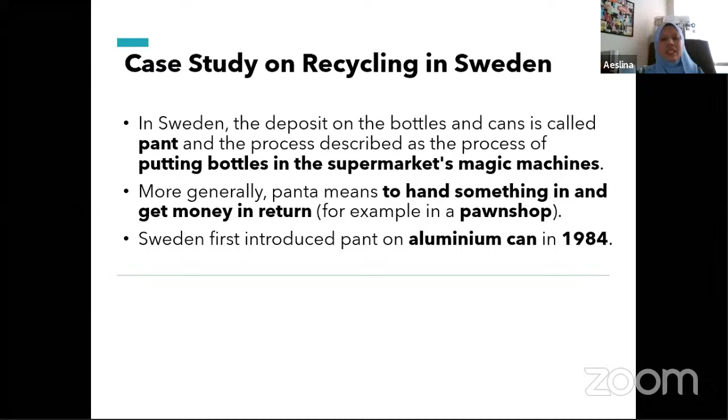So case study: recycling in Sweden. In Sweden, they have this like supermarket magic machine. It's like a reverse vending machine, the same concept. So you hand something in and you get money in return. You put the recycled item, you get the money. It was first introduced in 1984. So I think most of the developed countries are trying to shift to that side of technology.

Okay. So in 2015, the country recycled 1.4 million tons of waste, and now they aim to recycle 100% and also come up with renewable energy by 2040 with zero gas emission by 2045, which is quite amazing for Sweden. So these are the reverse vending machines and all sorts of recycling facilities that they provided in Sweden.

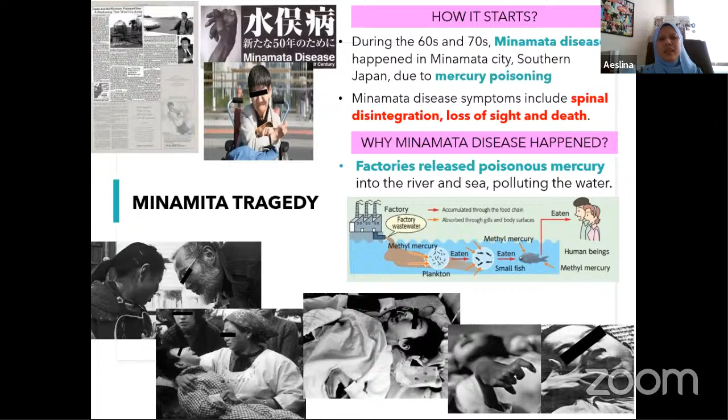Okay, last but not least, in Japan, they also have gone through a few processes until in 2000, they really sorted all the reduce, reuse, recycle, and also recovery seriously. How did it start? Because of the Minamata disease, due to the mercury poisoning released from the factories, then they took the waste seriously. So they have so many acts that they developed due to that, so that all the legal system is establishing Japan as a material-cycle society.

And if you look at all the guidelines in waste management in Japan, every single city has their own guidelines, their own booklet on how they should recycle their waste, which day they should recycle plastic waste, with what color of plastics, and then which day they should recycle bottle glass waste, and what color of plastics. They have all the rules stated in the booklet and also the guidelines. And every city has their own guidelines and also booklet on how they should recycle.

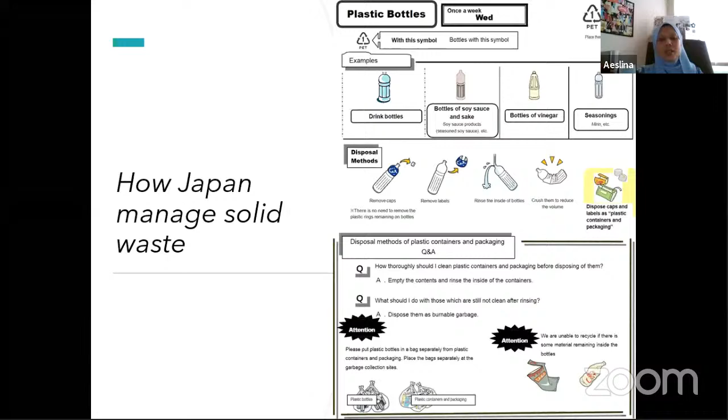So if you see from this slide, it is quite clear how to tackle every single waste that we should recycle, which is good. Okay, if you have a bottle, you have to take it out, you have to wash it, you have to take off the label and so on. Even the label, the cap, the plastic inside, you have to separate properly. And amazingly, I think Japan really became a material society, recycle society, because they follow the rules obediently, okay? So they also have the same reverse vending machine that turns trash into rewards.